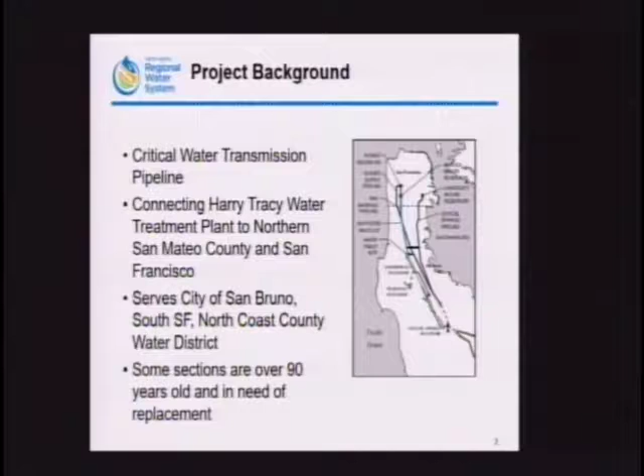San Andreas Pipeline Number 2 was constructed of quarter-inch thick lock bar steel in the 1920s, so some sections are over 90 years old. Lock bar steel pipe is basically 2 semicircles of pipe that are joined together by pressuring a bar to sandwich the longitudinal seams together. So the pipe is not welded together. It's basically pretty primitive, but has lasted 90 years. So next slide, please.

So we will be rehabilitating approximately 6,500 feet of 54-inch diameter pipeline in 4 segments, as you can see here on the map. As Jimmy mentioned, we'll be starting at our Harry Tracy Water Treatment Plant, and the last segment is at the Golden Gate National Cemetery. So most of the pipeline work will be done by open trench and some by slip lining, where a smaller diameter pipe is pushed through the existing pipe.

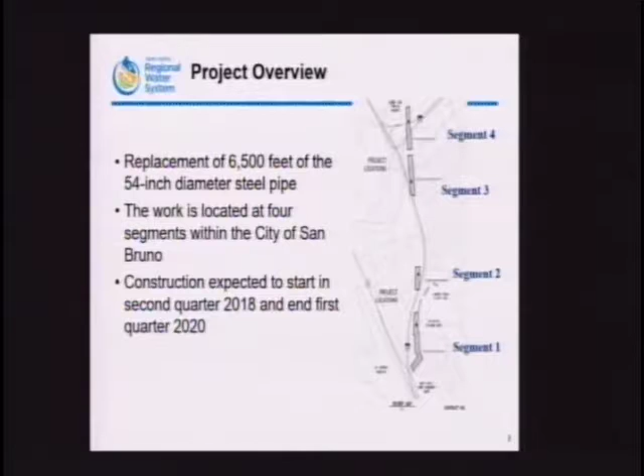Open trench is the preferred method because it maintains the hydraulic capacity of the pipeline. Slip lining will be done where we have difficult access or where trenching across roads will be highly disruptive. Construction is anticipated to start in the second quarter of 2018 this year and finish the first quarter of 2020. Water supply will not be affected during construction. Next slide, please.

At segment 1, we will be replacing approximately 2,300 feet of pipeline. And again, as Jimmy mentioned, this is where the pipe failed in 2015. This segment spans from Harry Tracy Water Treatment Plant to the Junipero Serra County Park. All work will be inside the treatment plant and county park, except at the crossing of Crystal Springs Road. Not sure if you can see that, but it's kind of at the top of the photo there.

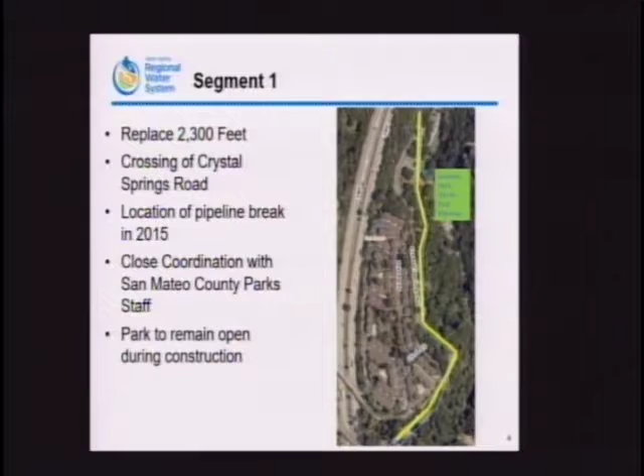So most of the work will be open trench, except we will be slip lining inside Harry Tracy due to access. So we have worked closely with the county park staff, and we have an MOA that will be presented at their board meeting for approval in February. The park will remain open during construction.

Next slide, please. So segment 2, we will be replacing approximately 1,175 feet of pipe. This segment starts just north of Highway 280 and ends north of Peninsula High School. It runs parallel to Courtland Drive and Peninsula High School inside the Chinese church grounds. All pipeline work here will be by open trench.

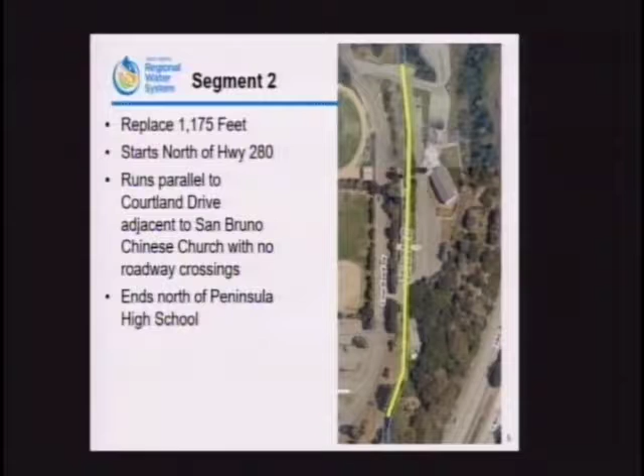We have been in touch with the church and high school to inform them of our activities and to ensure that we avoid any conflicts with their operations and services. In addition, we have an agreement with the high school to use property for staging. Next slide, please.

At segment 3, we will be replacing approximately 2,750 feet of pipeline. So this segment starts just east of the Highway 280 San Bruno exit ramp and ends just south of the 280 ramp behind the Mollie Stone's Market and the YouTube building. The majority of the pipeline work here will be open trench, except for the crossing of San Bruno Avenue, which will be by slip lining. We have worked with the Mollie Stone's and YouTube staff to ensure that impacts will be minimal to their operations. Next slide.

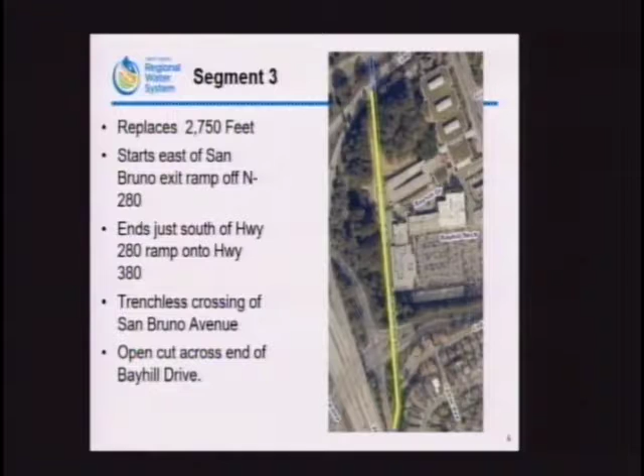At segment 4, which is one of the more complicated segments, we will be replacing approximately 1,450 feet of pipeline. This segment starts north of Highway 380 at the Cherry Avenue Villa, runs through the Peninsula Place, and ends at the Golden Gate National Cemetery. Most of the pipeline work will be done by open trench except 2 locations. We will be slip-lining about 80 feet under Highway 380, and we will have a trenchless crossing of Sneath Lane.

We have had multiple meetings with the president of Cherry Avenue Villas and the general manager of Peninsula Place to discuss the project and to identify ways to minimize impacts to the residents. Next slide, please.

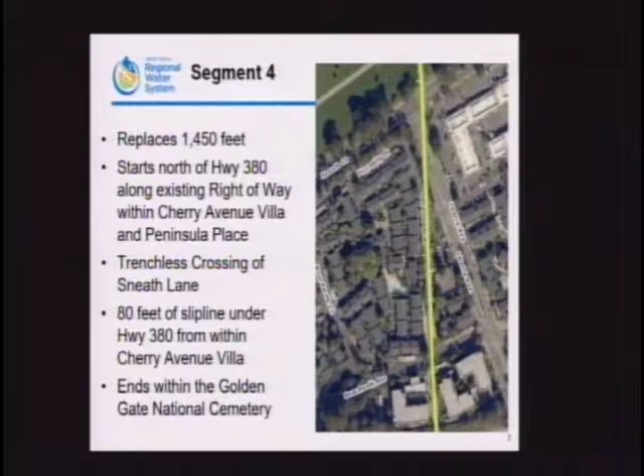So the project schedule: bids were received, and we anticipate construction to start the second quarter of this year and again finish the first quarter of 2020. Segment 1 will be the first since that was identified to be the most critical. The sequence of segments 2, 3, and 4 will be determined by the contractor's schedule and approved by the SFPUC. Each segment must be completed from construction to restoration within 6 months. Next slide, please.

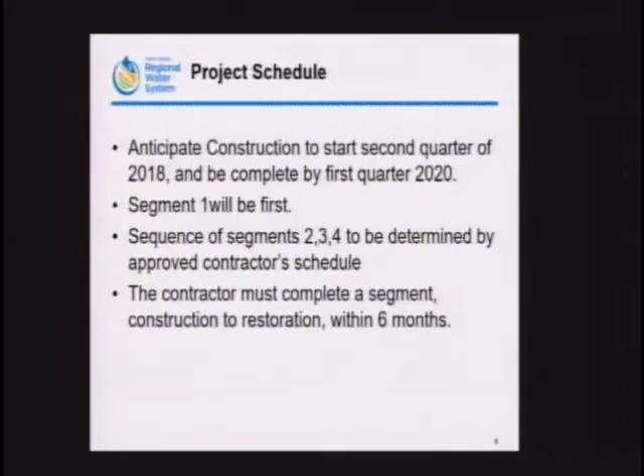We understand that construction can be disruptive, and we have built into our plans and specifications requirements to minimize disruption and to complete the work as quickly as possible. The contractor will submit and implement a noise control plan that complies with the City of San Bruno noise ordinances. Work will be between the hours of 8 a.m. and 5 p.m. on weekdays. Hauling of equipment and materials will be scheduled outside of peak commute hours as much as possible.

We will be performing pre- and post-construction surveys to document site conditions. We will protect utilities in place or reroute if necessary. And we will work with property owners and the City of San Bruno staff to repair damage caused by construction. In addition to complying with the California Environmental Quality Act, we will also be following the SFPUC's standard construction measures, which are designed to ensure environmentally responsible practices. We will have a full construction management team to monitor the contractor to ensure all work is in compliance with local ordinances. Next slide, please.